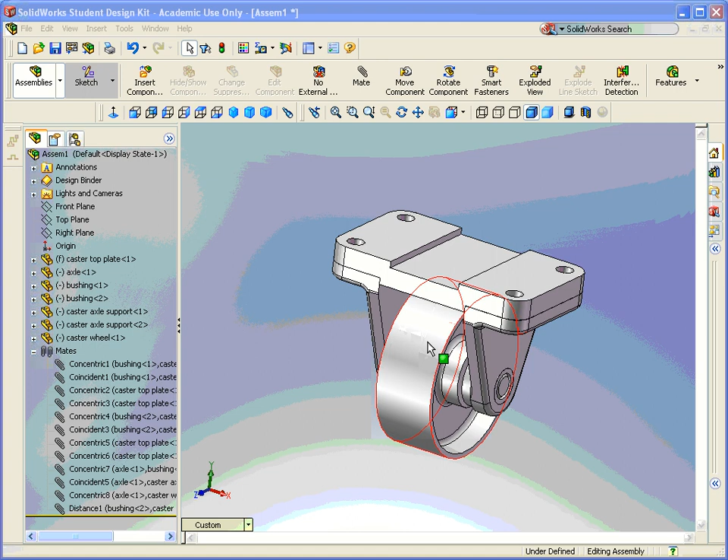Now that our wheel assembly is put together, we want to insert an exploded view and actually tear it apart. Exploded view is right here on the toolbar, and it's pretty easy. I'm just going to click on the part that I want to explode or move away, and then it brings up a set of axes here.

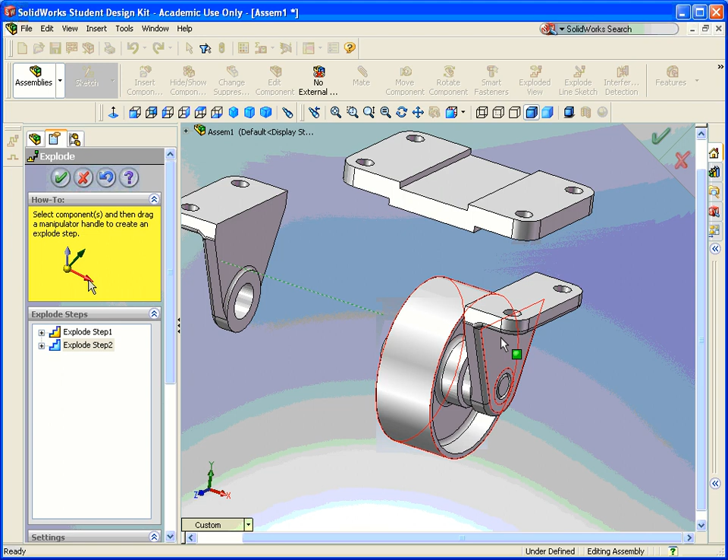I'm just going to click on this one and pull the top up. Click on the axle support. I'm just clicking on the direction I want this thing to explode. Come over here, find the other. And then maybe I want the axle to go this way. Then click on the axle again, and I'm going to drop the axle down.

Actually, you know what? I'm not going to do that. I'm going to delete this one out, and I'm going to delete this one out, and I'm going to click on both of these, hold the control key down, and pull both of those down at the same time. Then I'm going to pull the axle. Whoops, wrong direction, delete that one out. I want the axle to go this way. Alright, so there is my assembly.

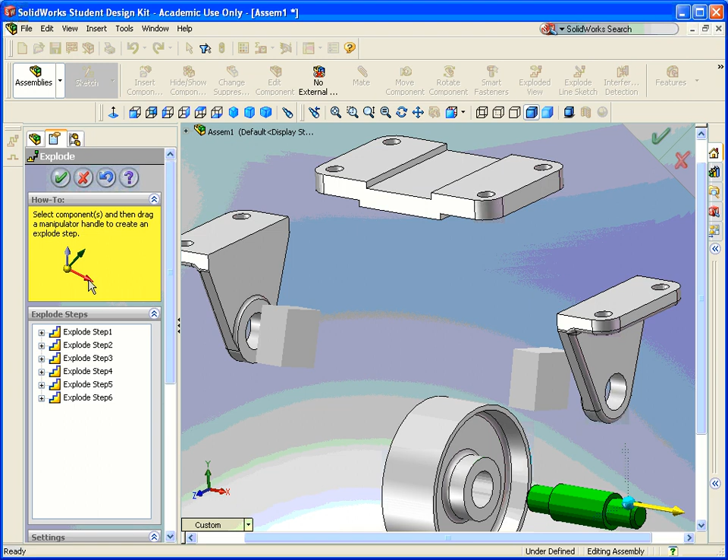Exploded. Once I'm done, if you hit the escape key, all of this stuff disappears and nothing has been saved. In order to make this stick, I'm going to click on the check mark right there. So there is my assembly.

Now you'll say, how do I get it to collapse? In order to get it to collapse, I'm going to click on the second tab right here. Oh, I lied, it's this tab, the configuration manager. As I click on that, notice I have some plus signs in here. I'm going to click on that plus sign on the default, and then there's my exploded view with all of my steps. And if I didn't like a distance, I could edit that feature right there.

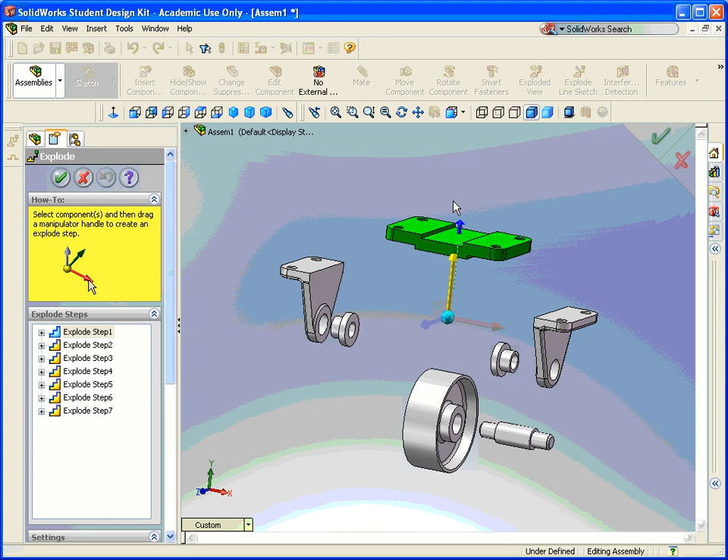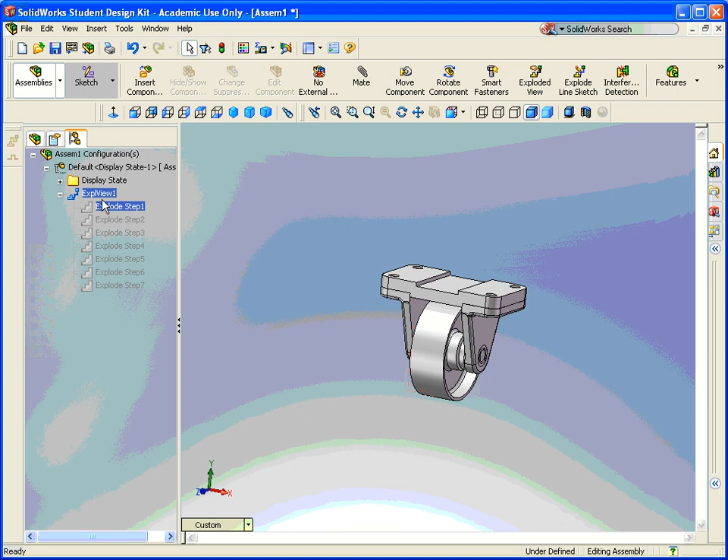I could change the distance. I think, yep, there's changing the distance. I could delete it out, whatever. In order to collapse this, I'm going to go to exploded view and right-click collapse. There it is, okay, so I'm back to my original state. Configuration manager: right-click explode, right-click collapse.

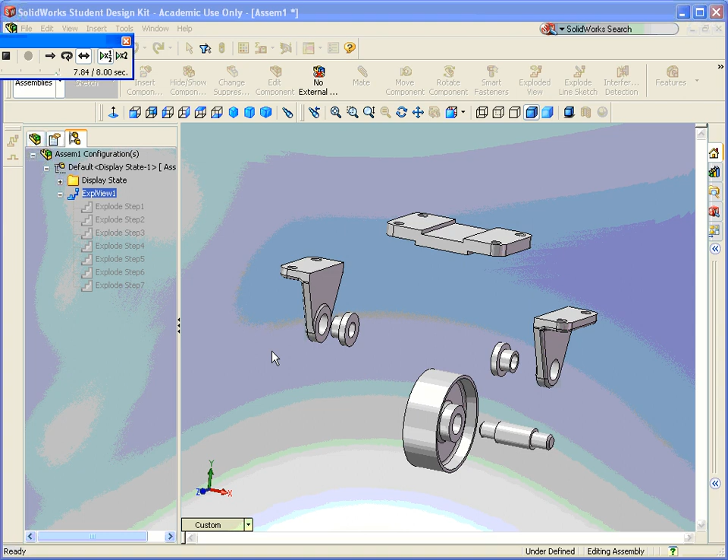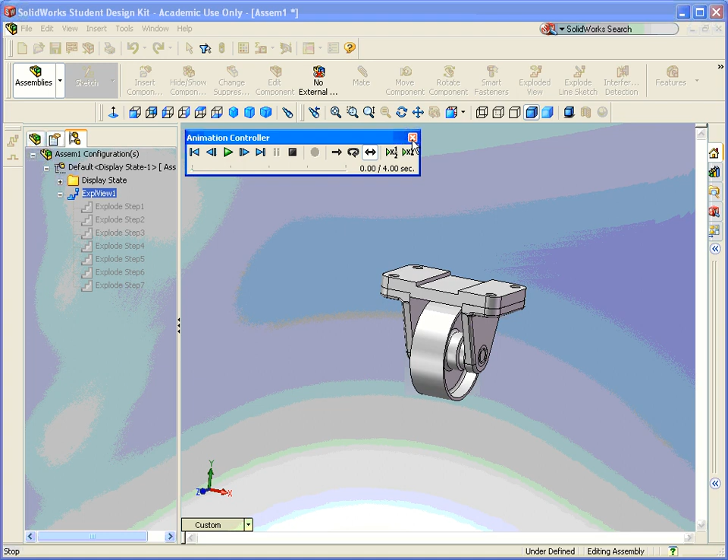We'll talk a little bit more about animations later, that I can actually save this out as an AVI file. So that's a little bit on how to explode and collapse our assembly.